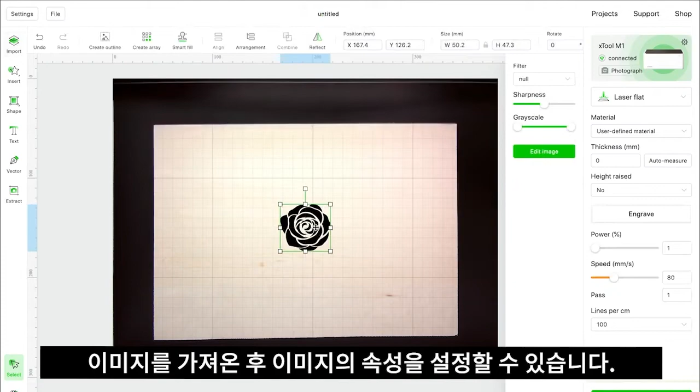Filter lets you add a grid filter for the image. Sharpness, with other settings unchanged, is related to the clarity of detail in an image. Grayscale is related to the contrast of light and shade. Slide the block on the left to the middle to enhance the shade, and slide the block on the right to the middle to enhance the light.

Insert is selected to draw a common shape: Line, Rectangle, Circle, or Shape, which inserts a shape.

Text inserts a text element, with the default text reading 'your text here.' After inserting the text, you can change the words and set the font size, typeface, and spacing.

Vector is selected to draw a vector path. After drawing a vector path, you can double-click an anchor point to convert it to a rounded corner or back to a corner, and adjust the curvature.

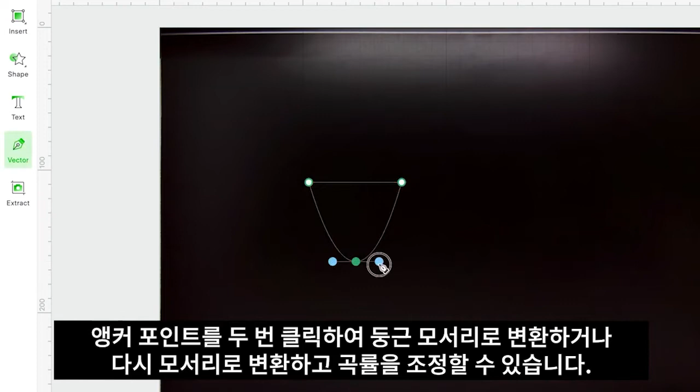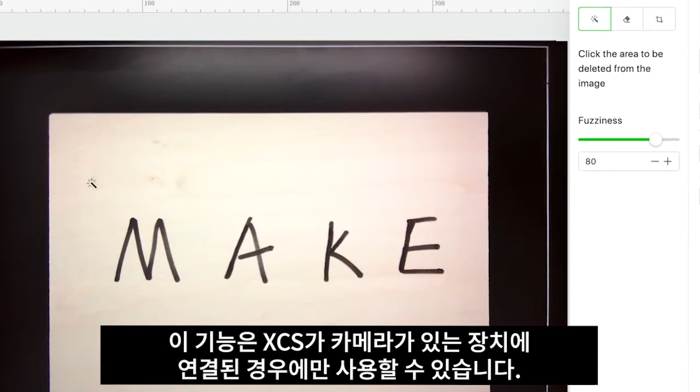Extract extracts images from the image captured by the camera of a device. This function is available only when XCS has connected to a device with a camera. You can use the magic wand, eraser, and crop tools to extract the image you want, and then use the image for processing.

Crop keeps the area you select. Eraser erases the area where you click from the image. Magic wand deletes the area you want to delete from the image. Click Save after you complete the extraction.

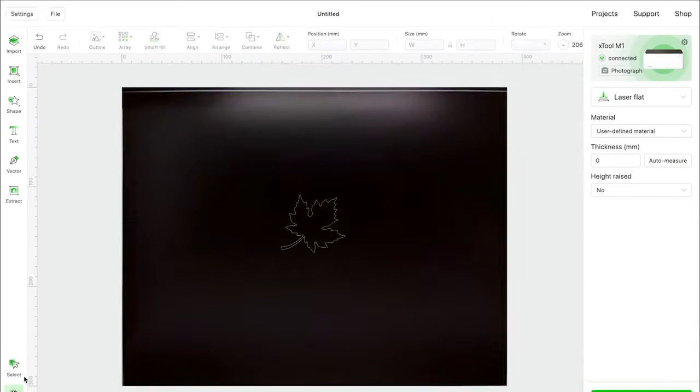Select tool lets you select an item or drag the mouse pointer over items to select them. Hand tool is used to move the canvas by dragging the mouse.

Undo cancels the last action. Redo performs the last action again.

Outline extracts the outline of an image. Select an image and click Outline. Array creates multiple copies of an element at a time and lays them out in grid or circular mode.

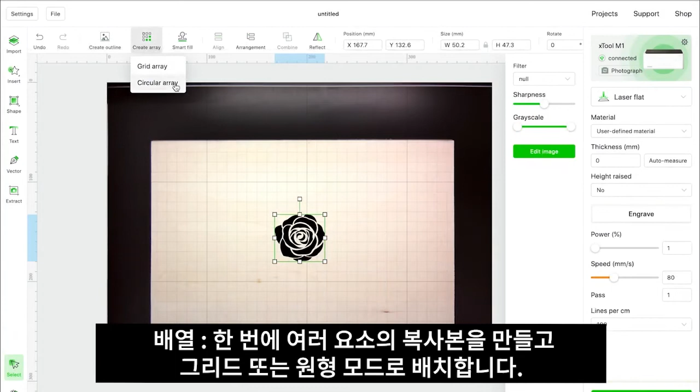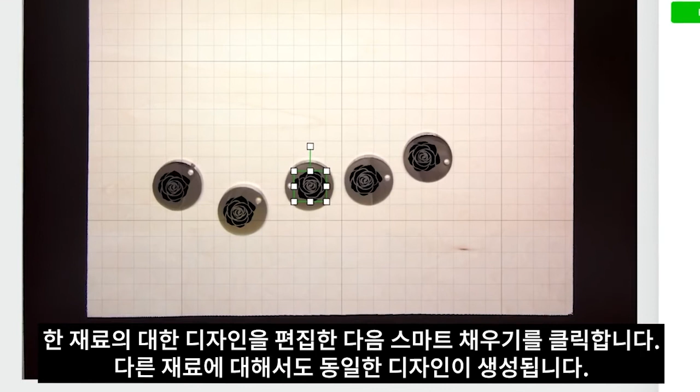Smart Fill duplicates a design element for multiple materials, helping you process multiple materials at a time. Edit your design for one material, then click Smart Fill, and the same design is generated for other materials.

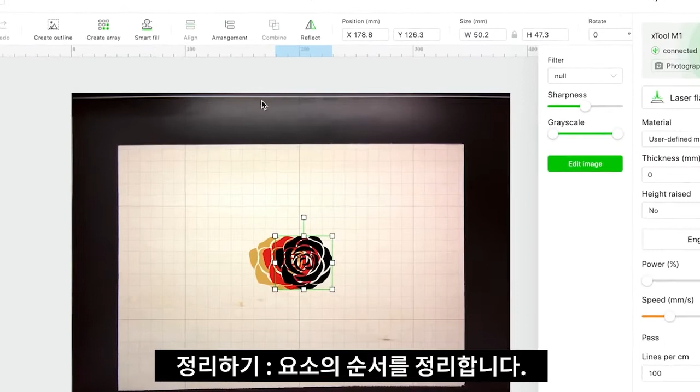Arrange arranges the order of elements. You can bring an element to front or send it to back, or bring it forward or send it backward one layer by one layer.

For example, to arrange the elements shown in the following figure: send to back, send backward, bring forward, bring to front.

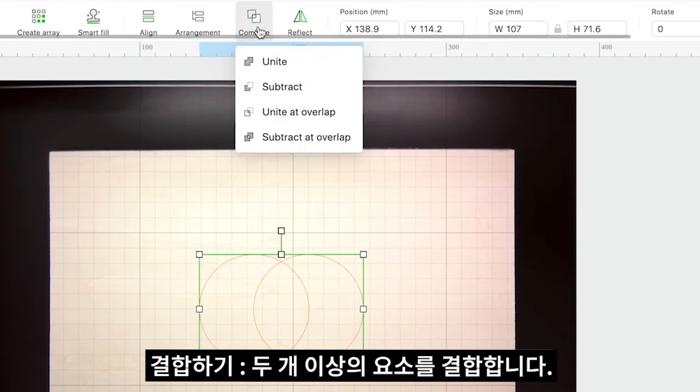Combine combines two or more elements. You can unite the two elements, subtract the two elements, unite the two elements at overlap, or subtract the two elements at overlap.

Reflect reflects an element horizontally or vertically. You can reflect the element horizontally, or reflect the element vertically.

Position sets the position of an element on the canvas by the X and Y coordinates. The point 0, 0 is in the upper left corner. The unit can be set in settings.

Size sets the size of an element. The unit can be set in settings.

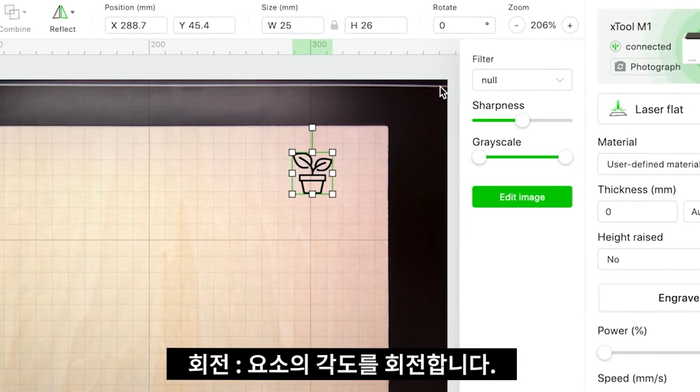Rotate an element by angle. A positive value indicates rotating clockwise, and a negative value indicates rotating counterclockwise.

Zoom zooms in or out the canvas or fits the canvas on screen. Canvas management lets you add, delete, or rename a canvas.

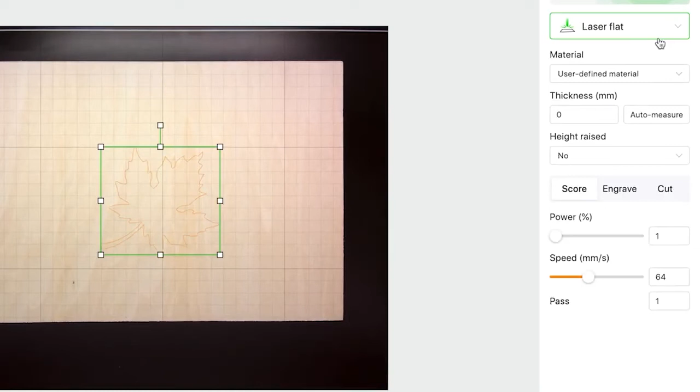Laser Flat processes flat materials by using laser beams. Laser Cylindrical processes cylindrical materials by using laser beams. Open Plane processes large area materials with the base plate of the device removed. Blade Cut processes materials by using a blade module.

If you use a material launched by XTool, select your material from the drop-down list box. If you use one purchased from other manufacturers, set it to user-defined material.

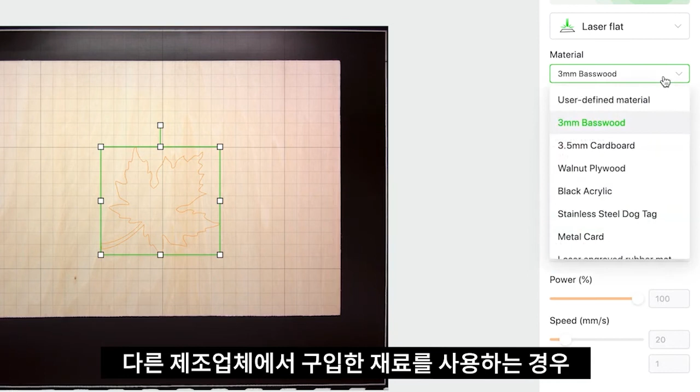If you use a user-defined material, you can click Auto Measure to enable XCS to measure the thickness of the material. If Auto Measure fails, use a caliper to measure it and enter its thickness.

If you have raised your material by using triangular prisms, select Triangular Prism.

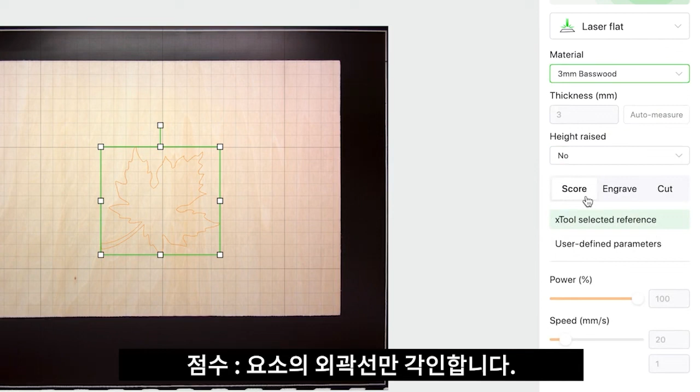Score engraves only the outline of an element. Engrave engraves the fill of an element. Cut cuts the outline of an element.

Power sets the power for engraving or cutting. Speed sets the speed at which engraving or cutting is to be performed. Pass sets the number of processing times.

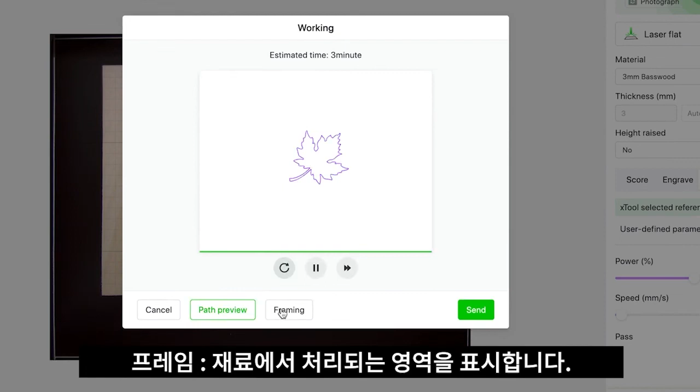Path Preview displays the processing path of your design elements. Framing shows the area to be processed on the material.

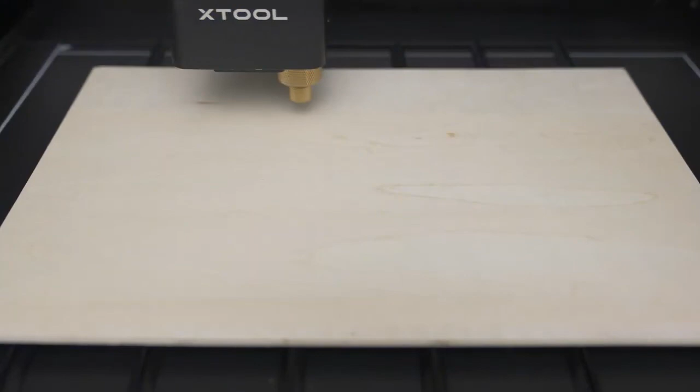If the design elements are to be processed as expected in the expected area, click Send to send the file to your device. Press the button on your device to start processing, and wait for the processing to complete.